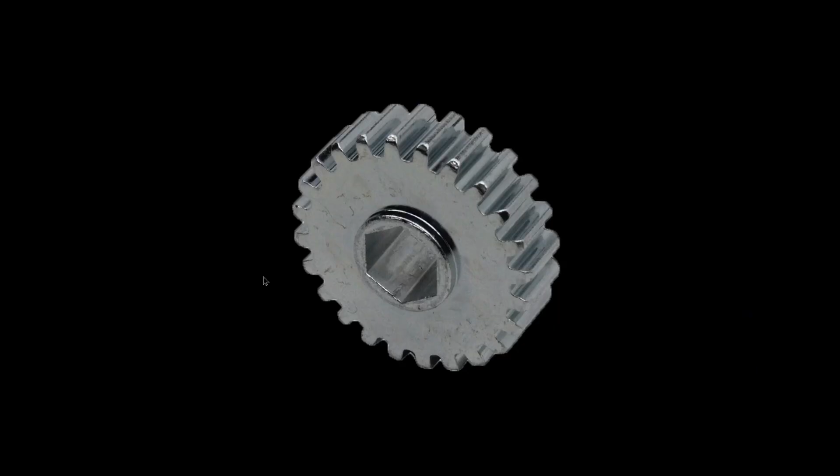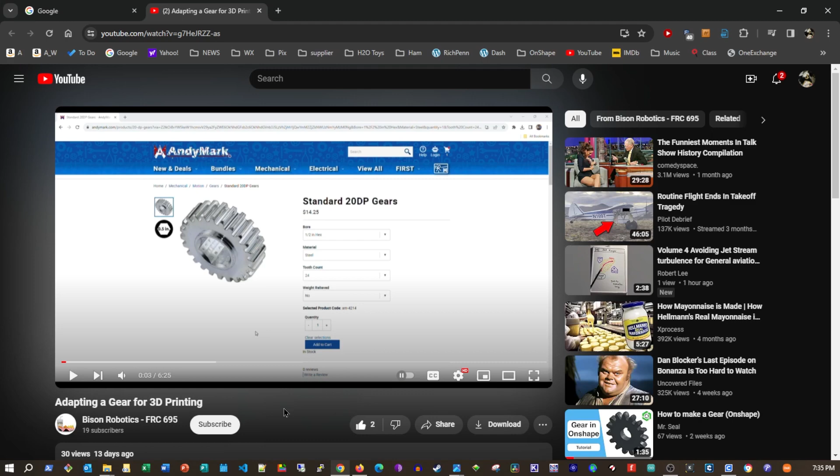This is the gear we're doing tonight. It looks pretty much like that, 24 teeth, 3/8 inch hex shaft, nothing fancy at all. Full disclosure, I found one similar to this done by Bison Robotics on his channel using different software for their CAD system, but it comes up the same way we want.

So the first thing, let's go find a gear. To find a gear, we'll go to a place called AndyMark. AndyMark has a huge amount of stuff. Tonight we're under mechanical, under motion, under gears. And while he has a bunch of them, we're just going to take a standard 20DP gear. 3/8 hex steel, 24 tooth, that's good enough. No weight reduction. And see what we can do with it.

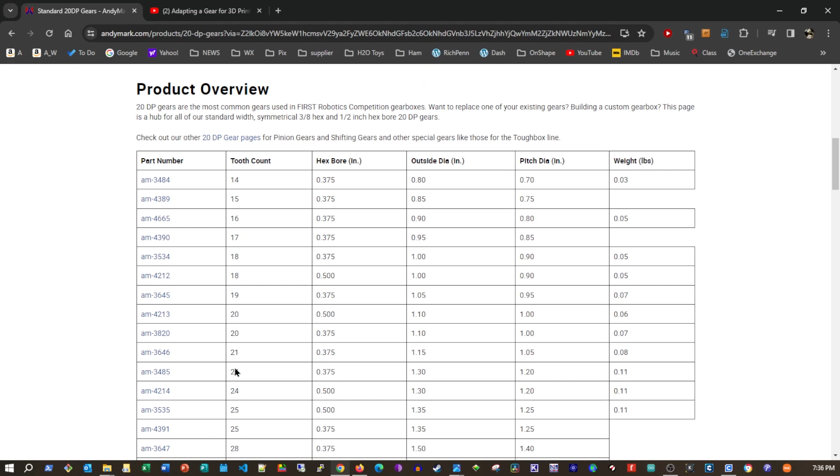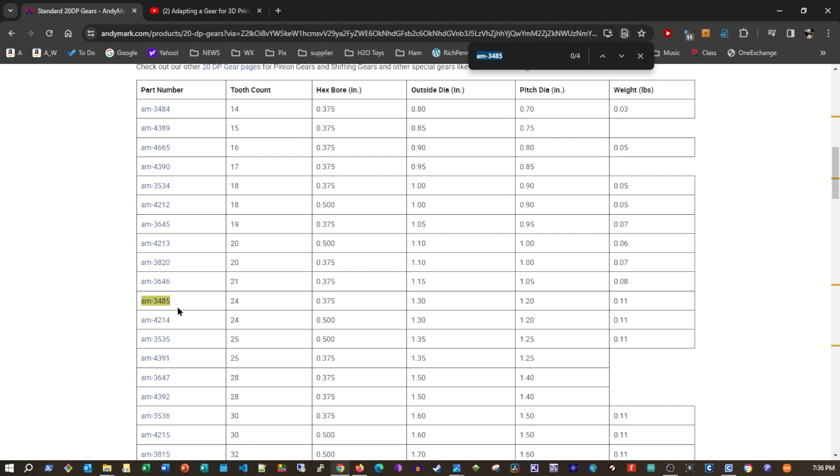If you look down here, here's all the different gears. And under 24s, you can have either a 3/8 or a 1/2 inch shaft. 3/8 inch shaft would be an AM-3485, which if we do a find on, we'll find not only the PDF for it, but coming down a little farther, we have CAD files with a step file. Step files being transfer files between CAD projects.

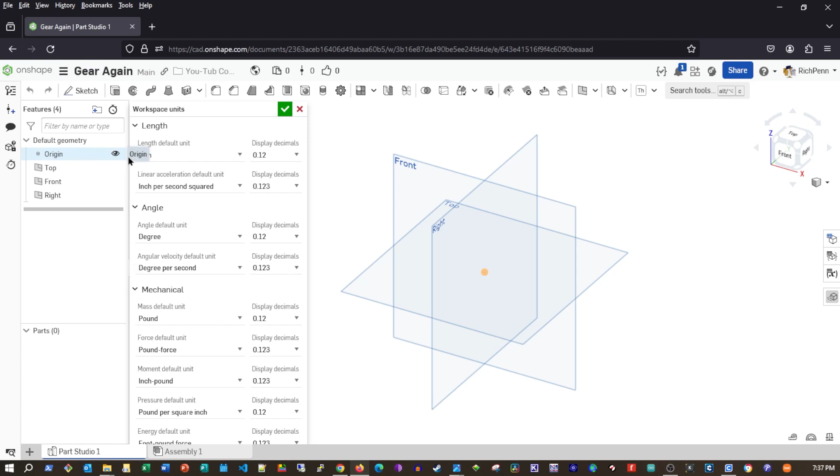So once we have downloaded it, we can go over and start up Onshape in an empty file. There's the one I did earlier. We'll do it again. Send that to trash. Create a new document, call it gear. Again, whatever. We are on the hamburger menu, we're in workspace in inches. Plus down here, import. The downloaded step file came in on downloads and it looks like this. It comes up, import this document, import appearances, select import.

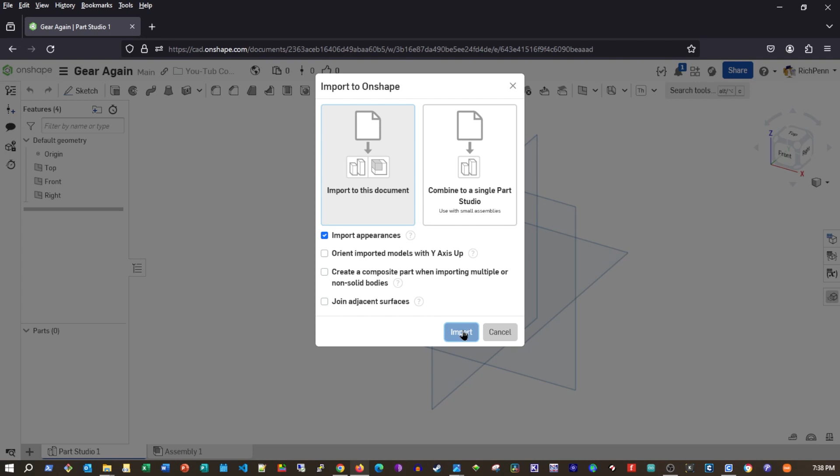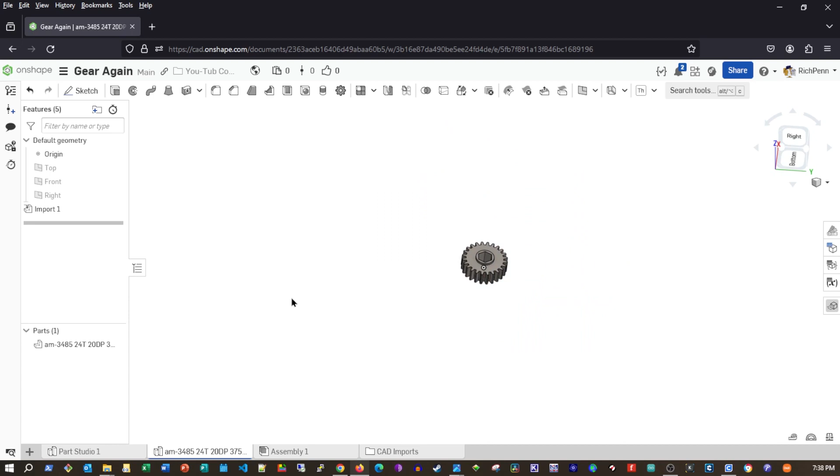And it will come up here and it will say importing, importing, importing. And if you'll watch down here, it's doing stuff while it's in here. It says import complete successful, which is what we're looking for. So we'll come over here to the part and there is our gear. Using the P as in Paul key to get rid of all the planes, we now have a perfectly good gear to print. The only problem is this washer face right here. If you put it down on a print platter, it'll try to create support all over this face you're going to clean up for the next hour.

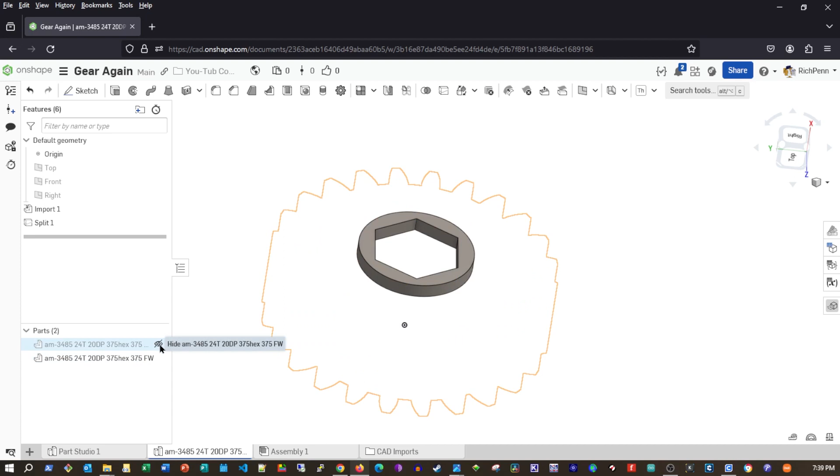The simple way to do this is simply split the part along this face and peel off that washer. In Onshape, you can go up here to one of the features called split, and it says what part. I want to split that part. What do you want to split it by? I want to split it by that face. Watch right over here in the bottom left corner. When I click the green arrow, you'll see I suddenly have two parts over here. If you turn that off, you'll see I have that part and I have this part. So I literally have two parts now. So I'm going to hide that and we will just have the gear with one washer face.

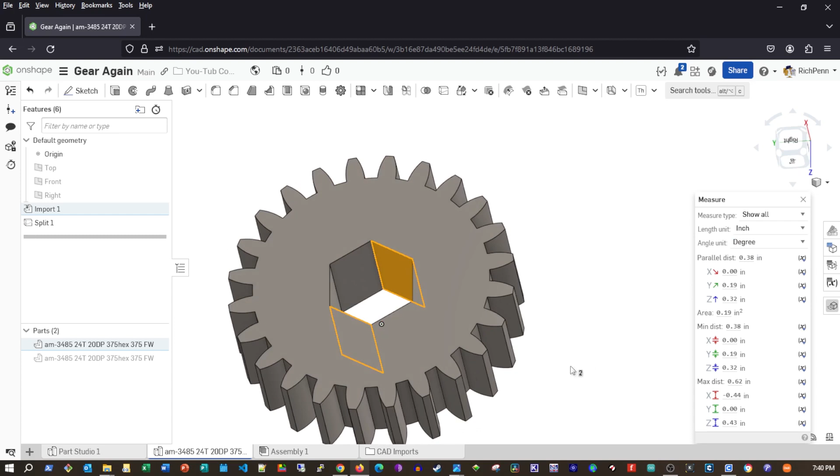The other thing we need to do: when you print with a 3D printer, everything comes out a little closer than you think. So this 3/8 hole, which if we come down to the tape measure and select one face and select the opposite face, is at .375 spacing. When we print it, it will be several thousandths under that and won't fit the shaft. So what we need is to make a slightly larger hole.

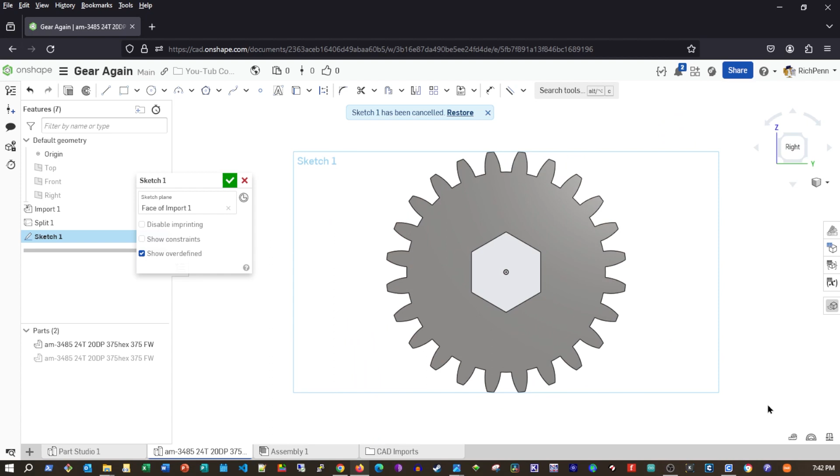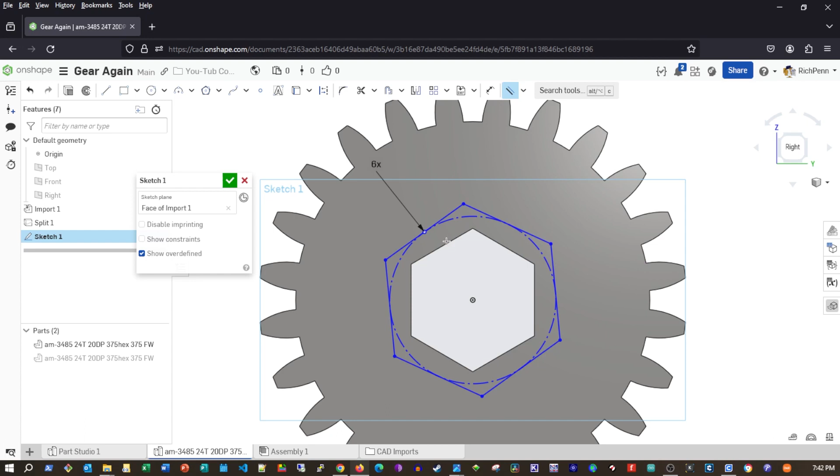Okay, from our gear, what we want to do is to start a sketch on that surface. View normal, zoom in. We're going to select circumscribed polygon, take the center point, pull out, click, set this on 6, click again, and we have everything except the size. If we come up here to the constraints and select the parallel constraint and select that edge and this edge, they will be in alignment.

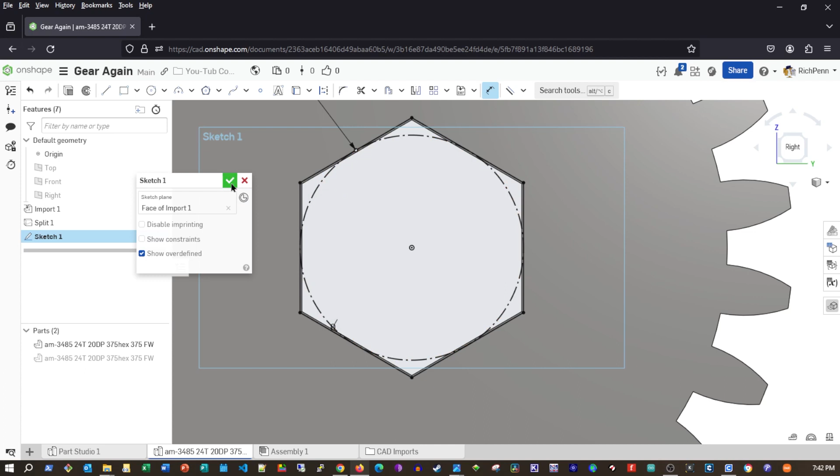Now what we need to do is adjust this spacing. We'll do that with dimension, select this line, select this line, go in 0.003. Little bitty green check mark, and we have a little bitty section in here you're going to have to zoom way in to get. Click on it, and then you can pull back out, go to extrude, remove, check mark.

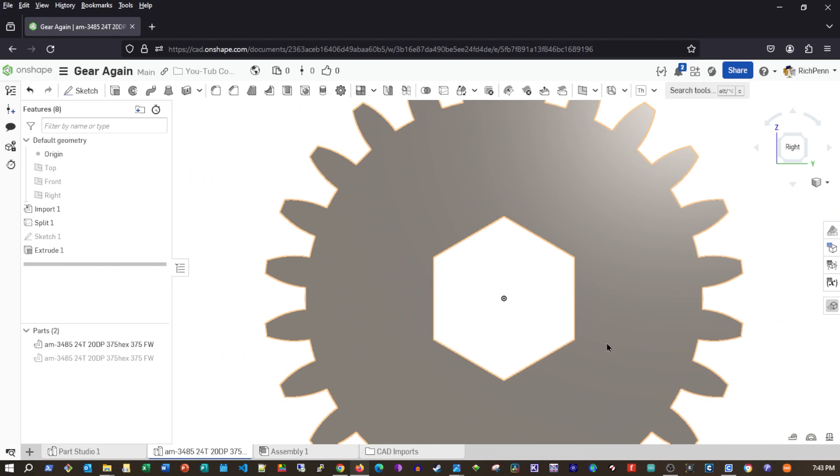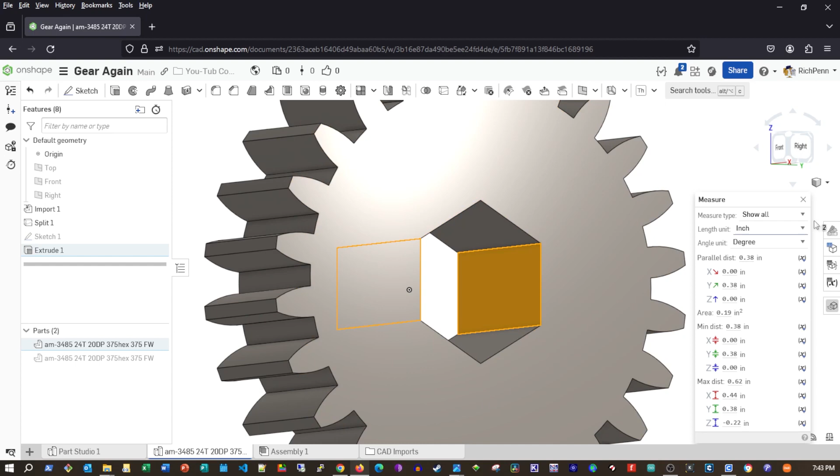If we go back to the tape measure and select that side and that side, our .375 is now .381, because we're going to gain about 3 thousandths on each face when we print. Well, we gain them on my printer. Your printer may be different. You'll just have to print a part or two, figure out what your adjustment factor is for your printer or your setup, and write it down somewhere, and then you'll have the number. But every printer is slightly different. Everything's just slightly skewed, but once you get it figured out, it's all good.

Anyway, all we need to do now, we have the part. We simply right-click over here, select Export. We're going to export this file as an STL. There's a whole list of different kinds you can do, but we're going to do STL in binary and millimeters to the download file and hit Export, and it's going to generate an export file.

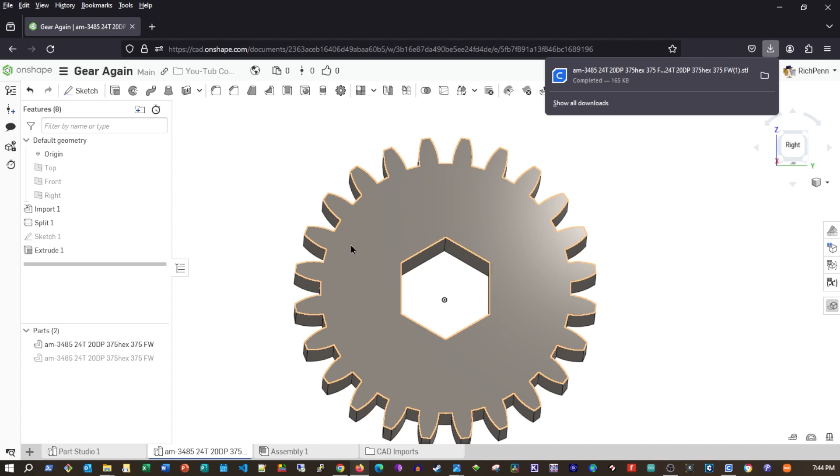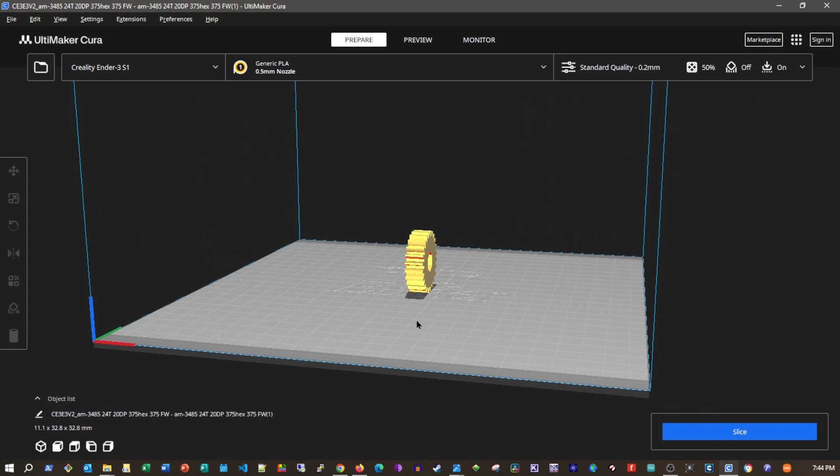Now I will bring up the slicer, and the one I use is Cura, C-U-R-A, incredible slicer, and it's free. Keyword here, free. We will select to import this, and in it comes. Unfortunately, it's kind of tilted in the wrong spot, so I'll select that, select this face to the build plate, and select right here on it, and it will lay down flat. And that is ready to go to the slicer.

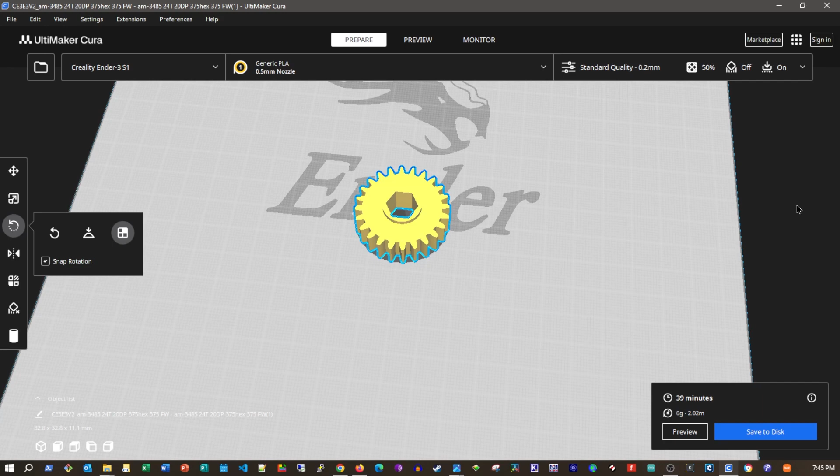If I select slice, it will come up and save it to disk, or we can do a preview if you want to see what it's going to do. And we can go one layer at a time as we watch it build. And from there, it's actually ready to print. That's it. That's all there is to taking a step file and bringing it into your printer.